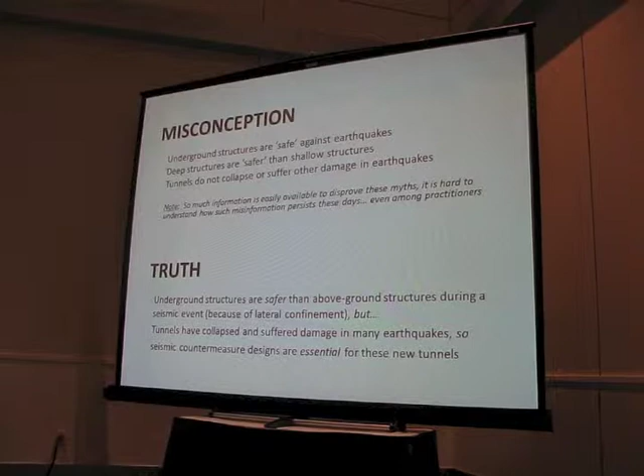Structures are safer than shallow structures - that is not necessarily the case. And then the last misconception here: tunnels do not collapse or suffer other damage in earthquakes - that's simply not true.

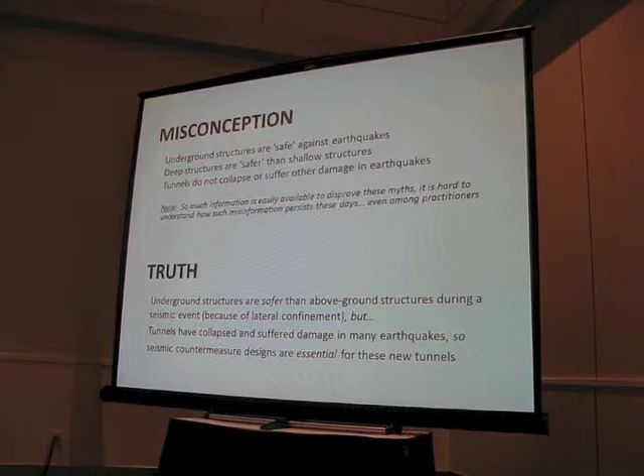So in studying this topic to prepare this presentation, what I found remarkable is that there is so much information that is very easily available to disprove these myths. And it's hard for me to understand how such misinformation persists these days, even amongst practitioners.

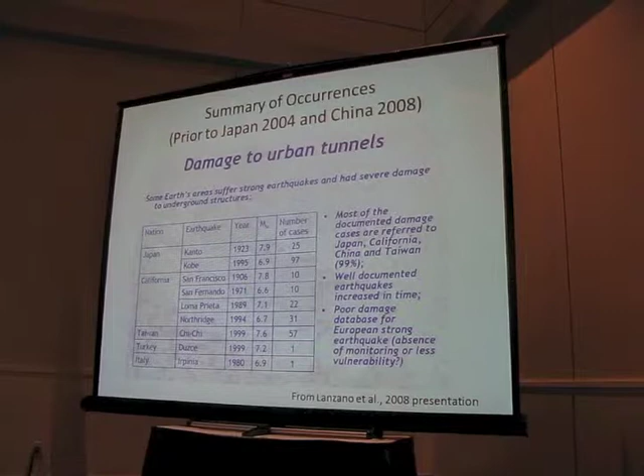This is from a paper that was published a few years back, a review paper that talks about damage to tunnels from earthquakes going back as early as 1906 San Francisco and 1923 Kanto in Japan. Some of these are well-known, well-studied cases early in the 1900s, but then also more recently some very well-studied cases like 1999 in Taiwan, the Chi-Chi earthquake, and then also more recently Japan 2004 and China 2008.

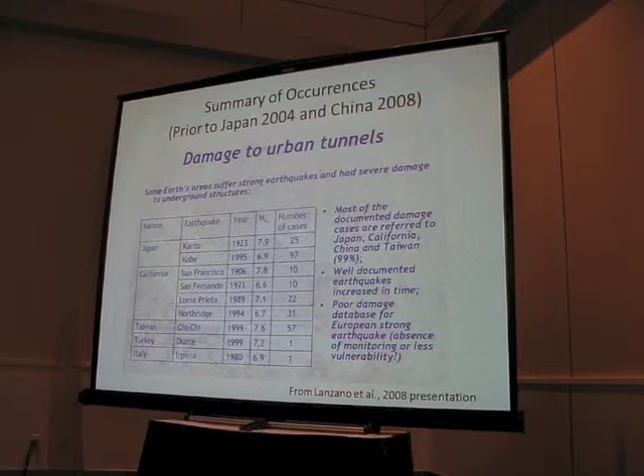Many more cases were studied, and you see these numbers in the right-hand column. There are not just dozens, but actually hundreds of cases of damaged tunnels, damaged by earthquakes, that have been studied by engineers. So this is actually a well-studied topic.

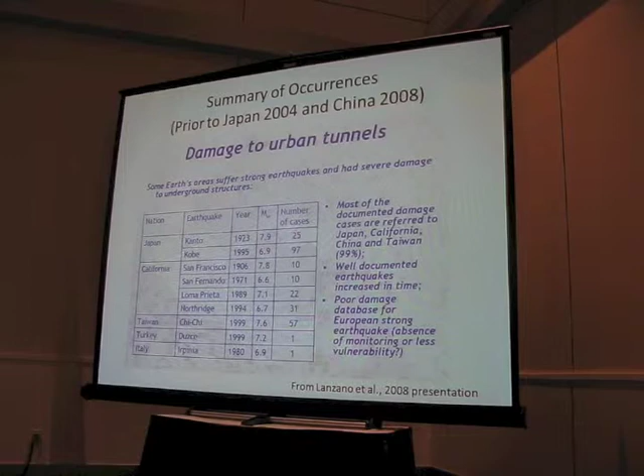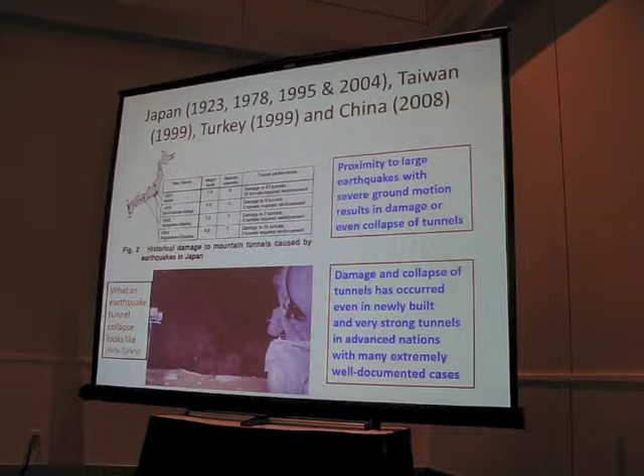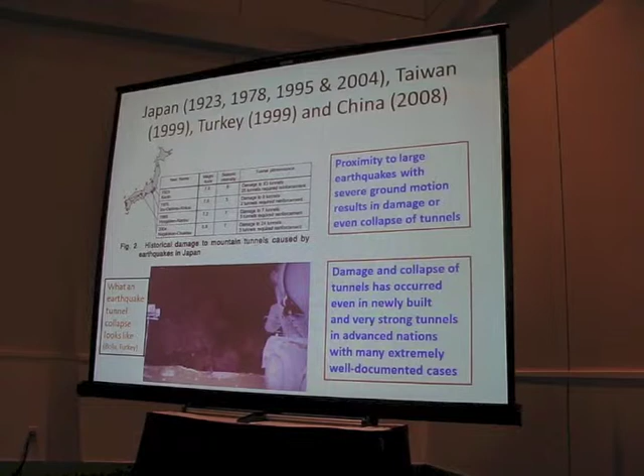I mentioned a few of these, but the other earthquakes in Japan that have been carefully studied also include 1978 and then the Kobe earthquake in 1995. In that case, I won't show it here, but there was a collapse of an underground station. So the large vaulted ceilings of an underground space like a subway station can collapse, and did, in the Kobe earthquake in Japan. I'm going to limit my comments here and this review to tunnels specifically, but underground stations also would need to be built extremely strong.

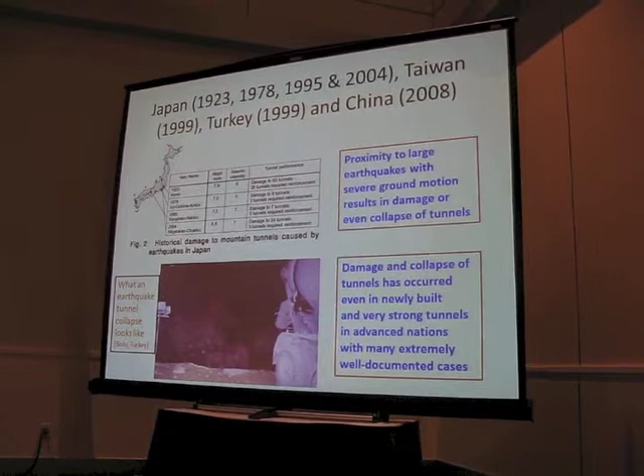So proximity to large earthquakes that have severe ground motions can result in damage or even the collapse of tunnels. Damage and collapse of tunnels has occurred even in newly built and very strong tunnels in advanced nations, with many extremely well-documented cases. The picture in the lower left is actually from Turkey.

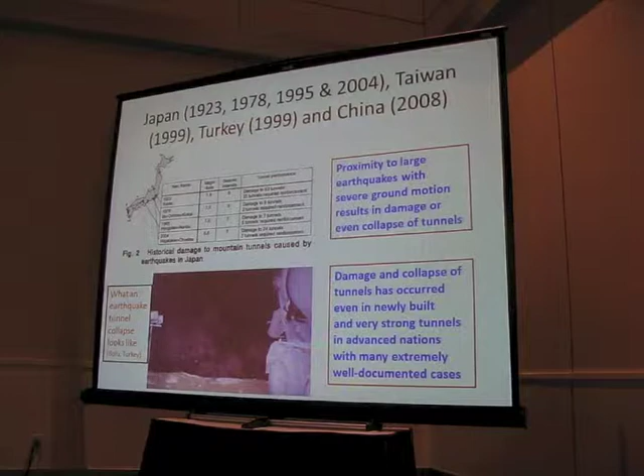This is a tunnel along the Trans-European motorway, and in fact this case takes a bit more explanation - we can come back to it. But this is a total collapse that you're looking at there. It was while the tunnel was under construction that this occurred.

And then the Longxi Tunnel in China collapsed in 2008. Again, a lot of these are examples of relatively modern construction where engineering design tried to take into account potential damage from earthquakes, and yet these failures occurred.

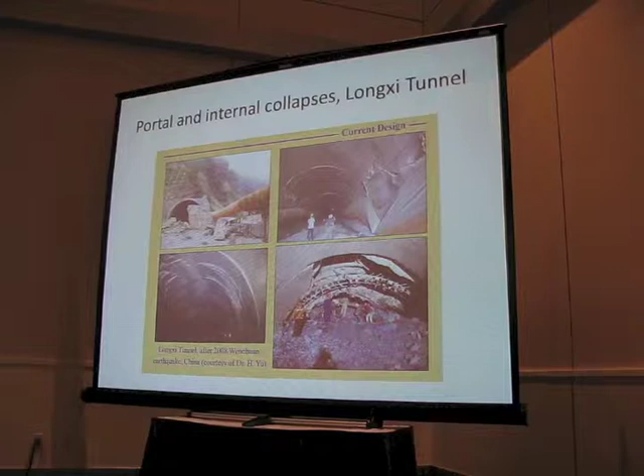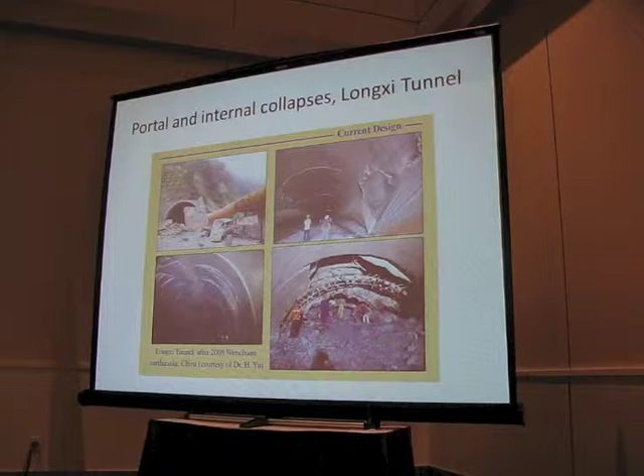One thing to note here is that the upper left photograph shows what's called a portal collapse. The entrances at either end of the tunnel need to be well designed so that you don't have rockfall or landslide damage at the ends.

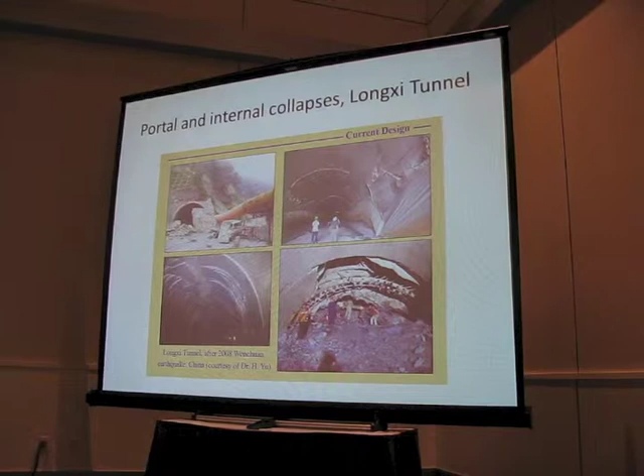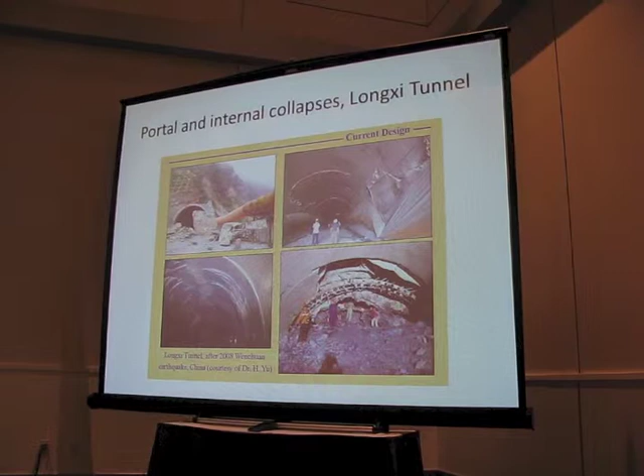And then the internal photographs show you examples of the kinds of cracking that can occur when a tunnel is compressed. It's called ovalization - you take a circular tunnel in cross-section, and the shaking can actually compress it and make it an oval shape, and that will result in cracking of different kinds that have been very carefully documented.

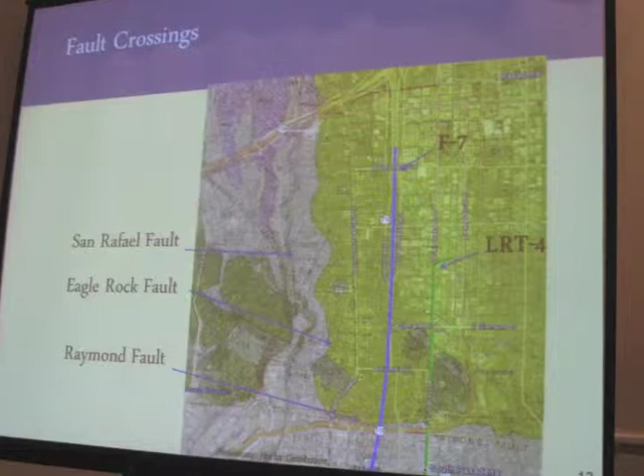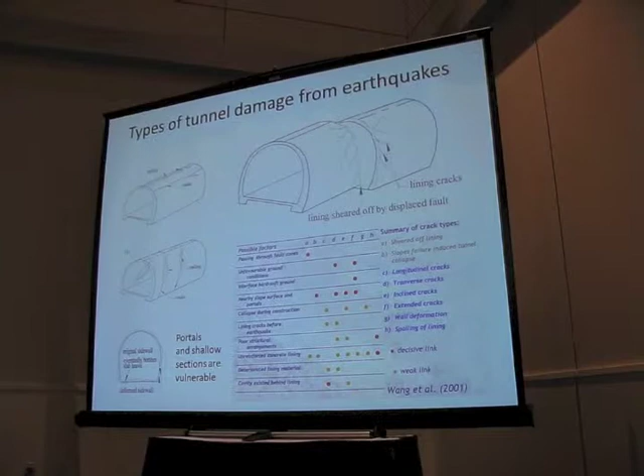This is just a summary of the many cases studied by Wang et al. in a very important paper in 2001. Another earlier paper, Yoshida 1999, reviewed this topic as well and showed ways in which one can design a tunnel to avert some of the kinds of damage that would otherwise occur.

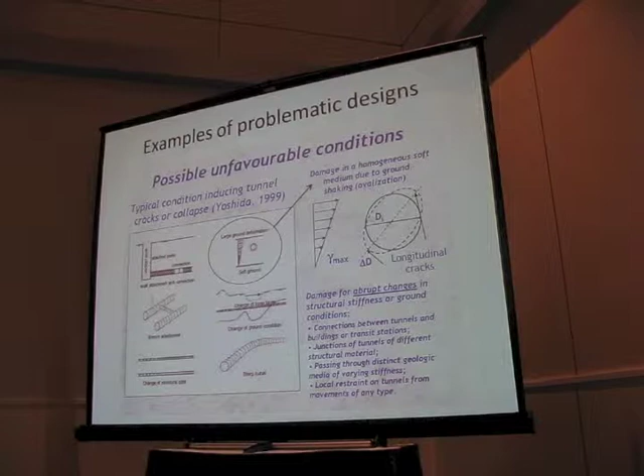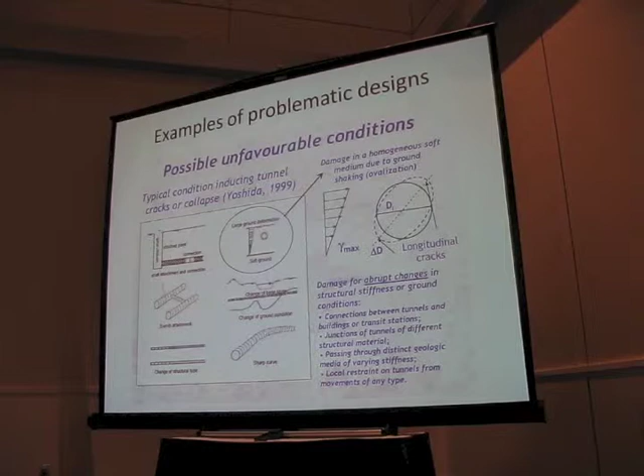So you want to make your tunnels straight, you want to have your connections heavily reinforced, and so forth. Best practices have also been recommended, and here's another one - design countermeasures.

Steve actually just showed you an example of this, where the plan would be that where tunnels cross faults, they would do this kind of jacketing to make the tunnel especially strong. This is not only important at fault crossings, but also where you have stiff ground, like what's shown here on the right, to softer ground shown on the left.

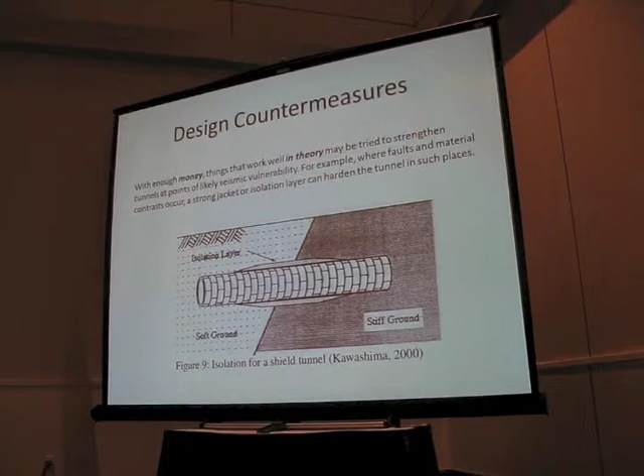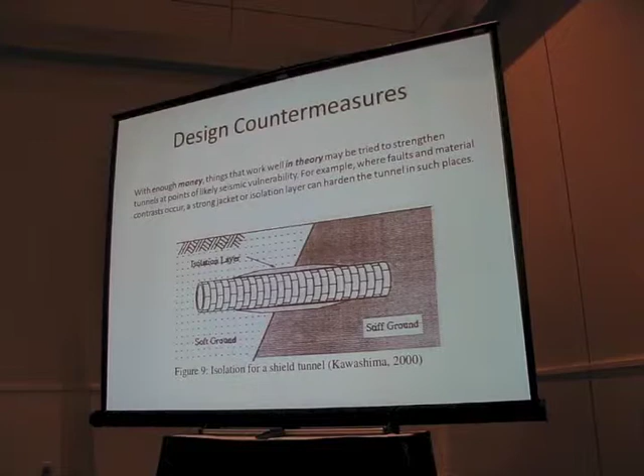Not only at active fault crossings, but also faults not considered active, and at strong transitions from stiff to soft ground, this kind of jacketing can help prevent collapse and failure.

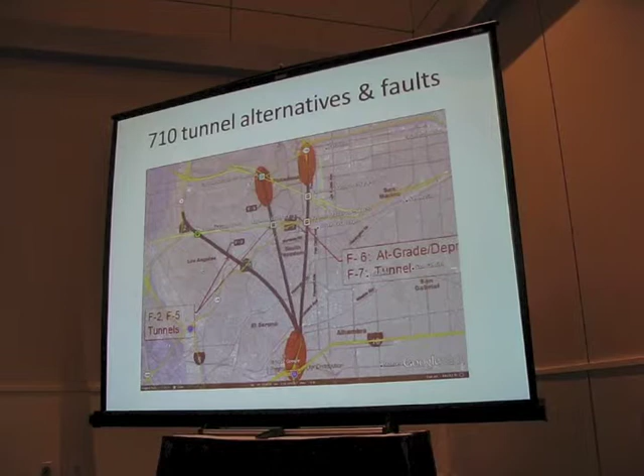Here are the proposed routes. The F7 route, as Steve just presented, is the one currently still being considered, but the other two take alternative paths, which you can see in other documents about 710 tunnel alternatives.

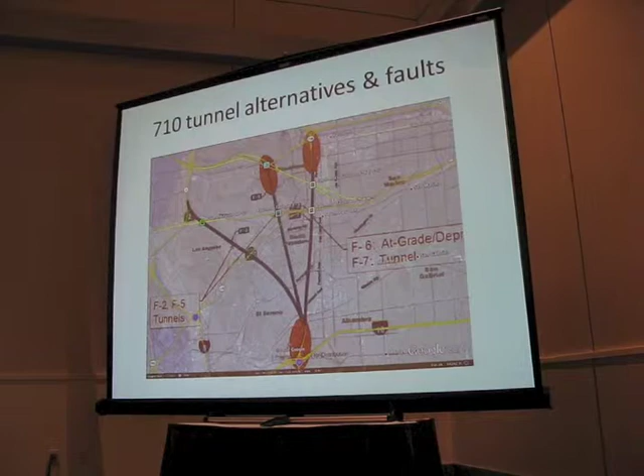I've shown here—I hope this laser will work. The yellow line is the Eagle Rock Fault Zone, and this is the Raymond Fault coming across in orange. I've darkened the map layer and let the base imagery come through so you can see the faults better, and the squares show the fault crossing points.

The F2 tunnel actually only has one fault crossing, on a section of the Raymond Fault considered less active, whereas the other two have two crossings each. I've highlighted those lines, and I'm going to punch through these slides.

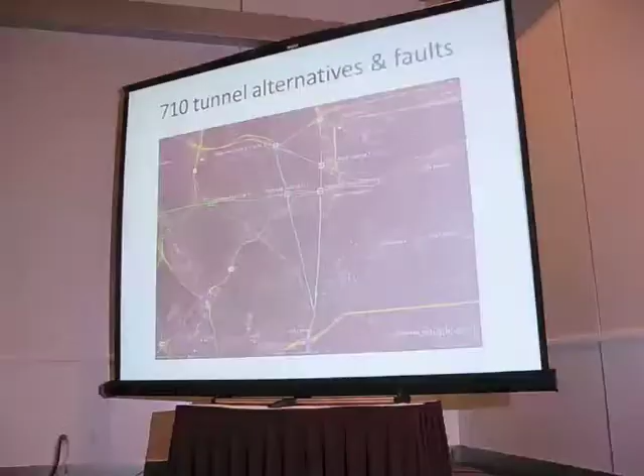Now let's take a look at that from the south. At the south end, you see the elevation here—this is the number 7 alternative coming right up into Pasadena, crossing those faults.

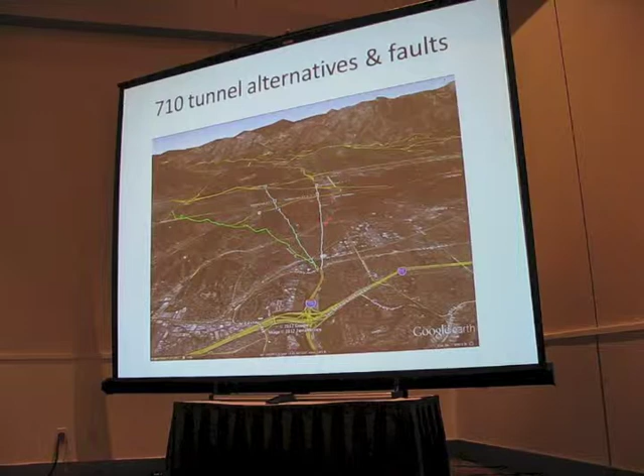What I'm going to show you next is something that occurred to me that I think should be taken into account. Apparently only this tunnel is still being considered, but of the other two, this one has a higher north end, and this one has a lower north end.

You can't see the elevations on this slide, but this one goes from 410 feet up to about 830 and 890 feet, whereas this one only slightly rises to 680 feet. So I'd think the lower grade in this tunnel would be an advantage, since you'd have less exhaust fumes and less brake pad lining fumes to ventilate—a simple advantage based on the topography.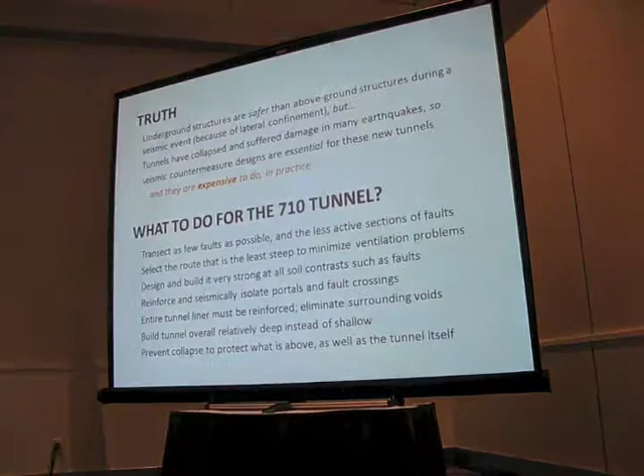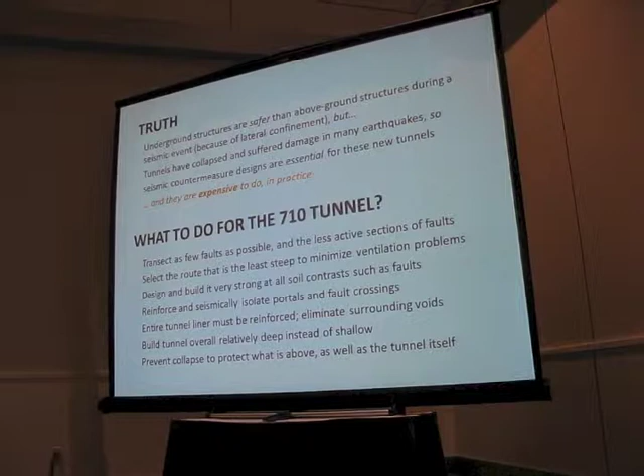Anyway, that's all I had. I wanted to wrap up with a recap of that intro slide: while underground structures are safer than above-ground structures, they still need to be carefully designed, and that's expensive to do in practice. These are just a list of things that ought to be done if the tunnel is pursued.

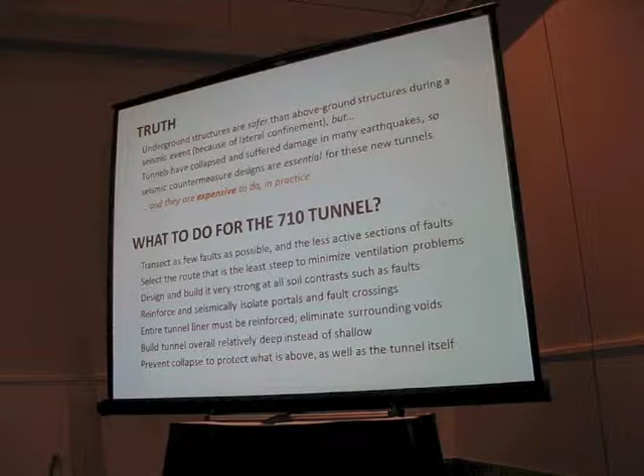Transect as few faults as possible, and in the less active sections of those faults. Select a route that is the least steep to minimize ventilation problems. Design and build it very strong, especially at all soil contrast points and at faults, whether active or not, especially at active fault crossings.

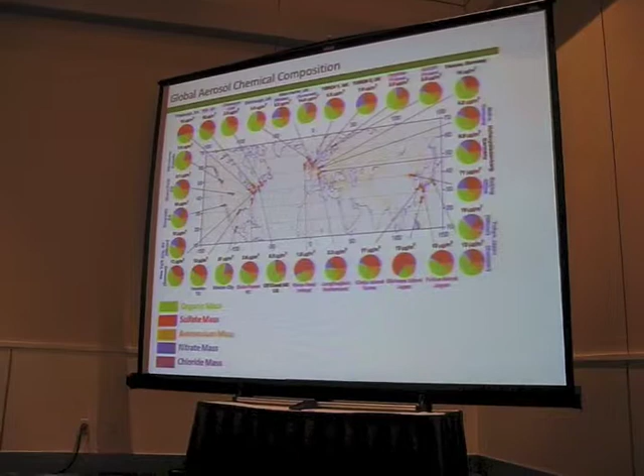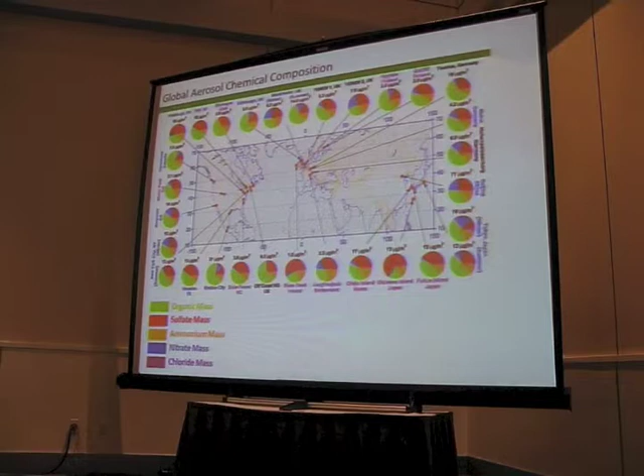Compounds and nitrogen oxides, in the presence of organic compounds and sunlight, make ozone. Ozone is the molecule that is monitored, and it's usually what you find in the paper as a measure of whether a particular day is smoggy, based on the ozone level. These are gases.

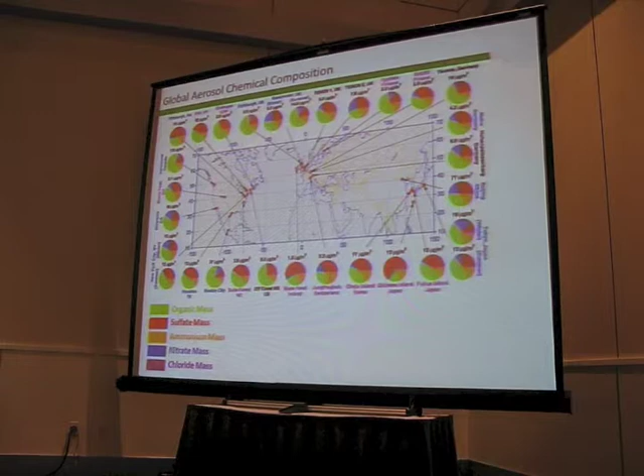Now, the air also contains particles, and that's what I mainly want to talk about. This chart, the first of two slides, I want to walk you through because it tells a lot about the nature of particles in the air around the Earth and what they're made of.

This map shows measurements of particle concentrations in the air at a number of locations around the world. Each of these little pie charts has colored sections corresponding to the different chemicals in the particles.

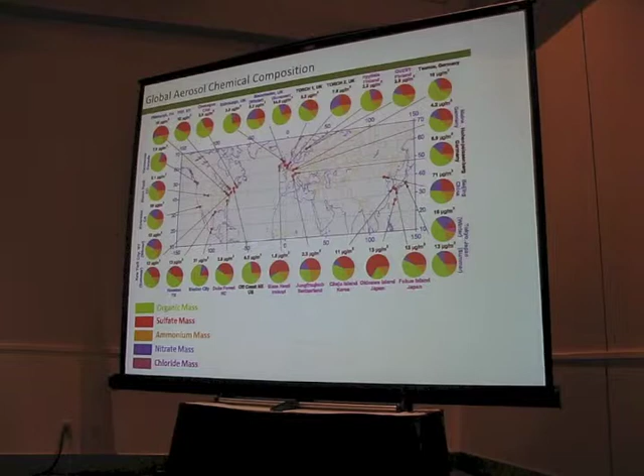Green represents organic molecular particles. Beijing, in red, has the highest pollution, at 71 micrograms.

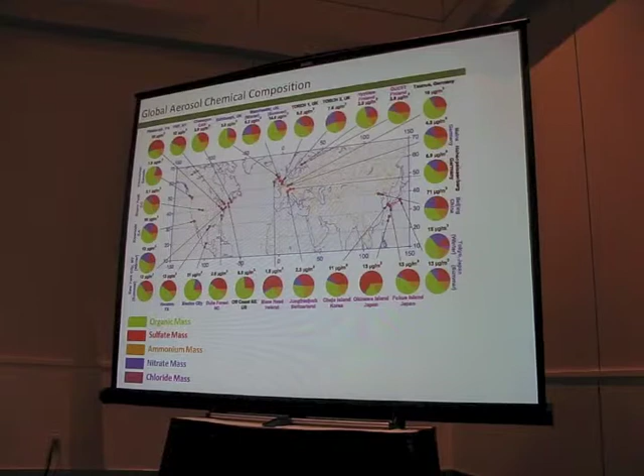The other extreme—the lowest concentration—is Mace Head, Ireland, on the west coast of Ireland, getting very pristine air off the North Atlantic, with 1.5 micrograms per cubic meter.

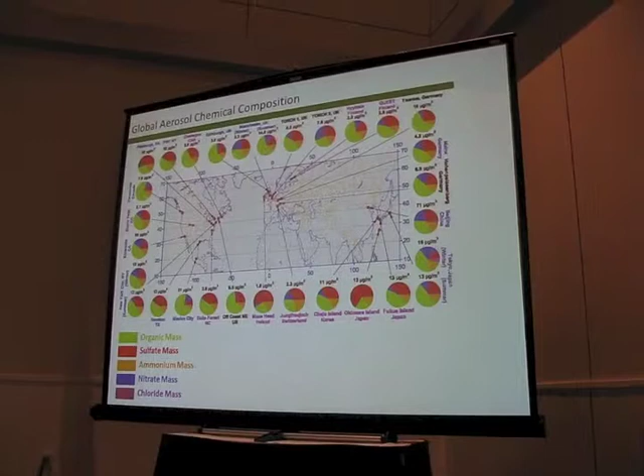Ireland has the least particulate matter. I show this to give you an idea of what's in the particles, and we can trace each of these, summarized here in bullet form.

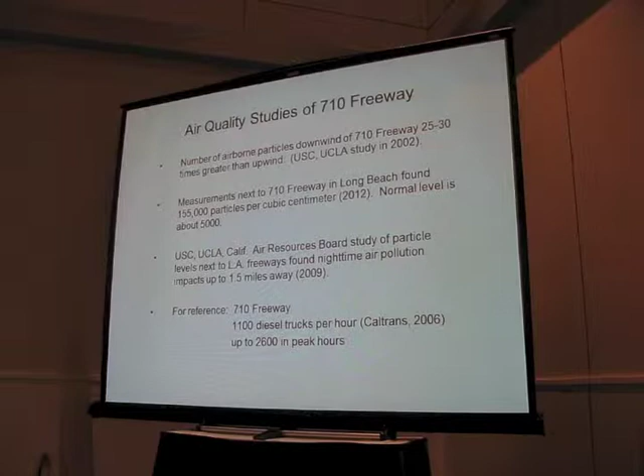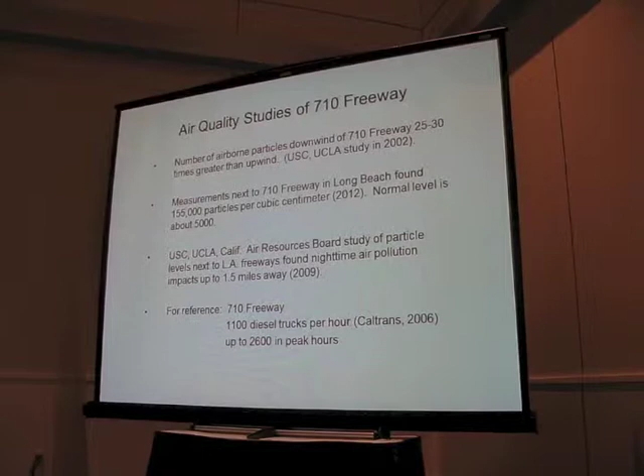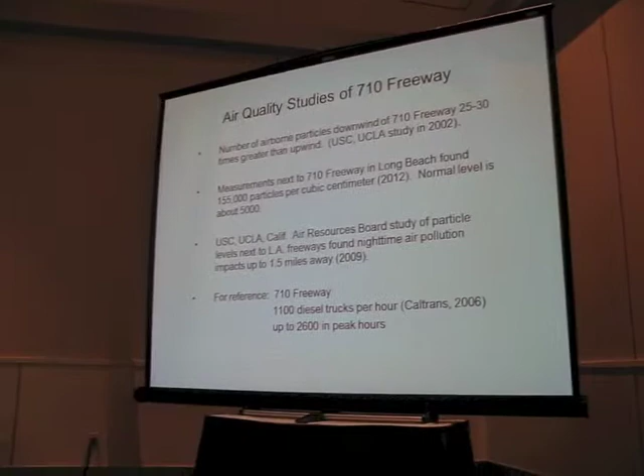The first one is a 710 study of the influence of the freeway on the surrounding community. Measurements made by USC and UCLA groups in 2002, in a very famous study of the 710, showed that the number of ultrafine particles, that's the number of particles per cubic centimeter, downwind of the freeway was 25 to 30 times greater than that upwind of the freeway. That's a measure of the exhaust.

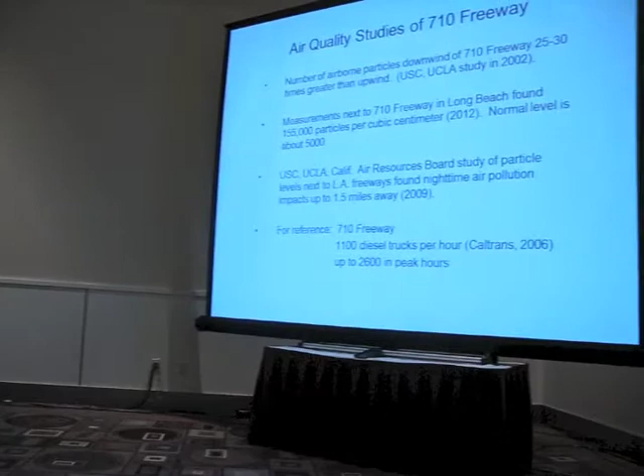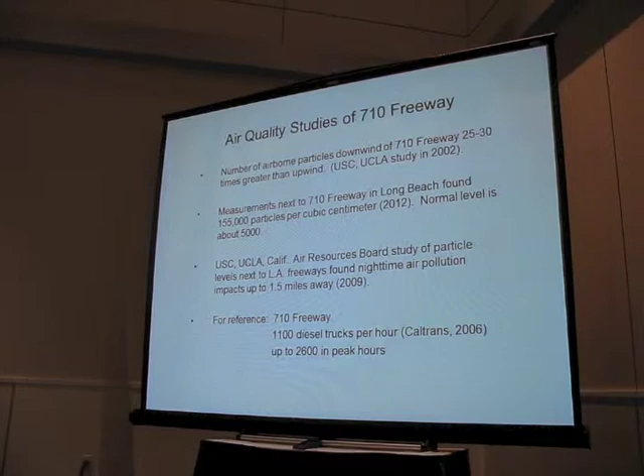A recent measurement next to the 710 in Long Beach found 155,000 particles per cubic centimeter. The normal level would be about 5,000, and pristine air would be less than 1,000. That's a pretty remarkable level.

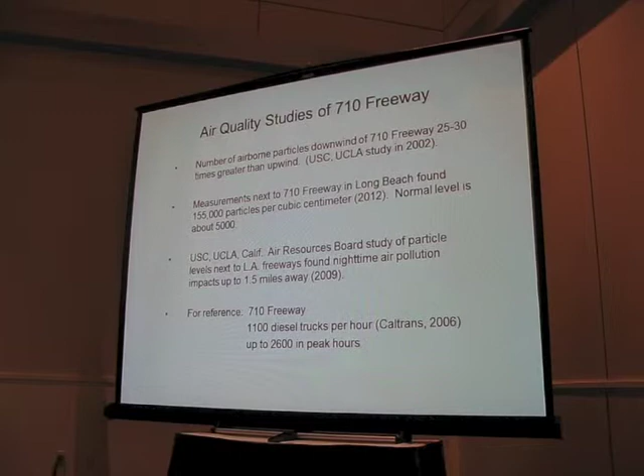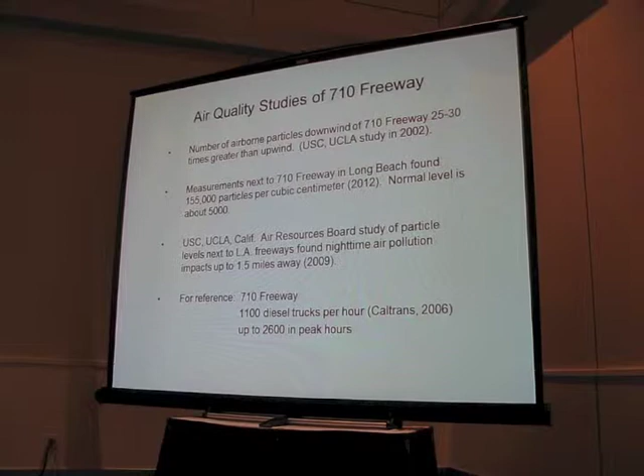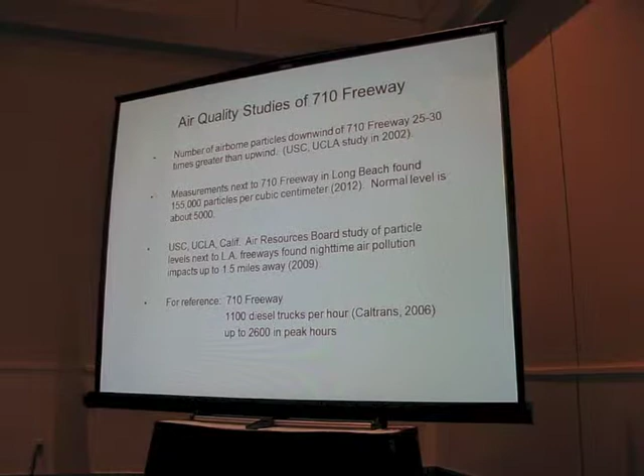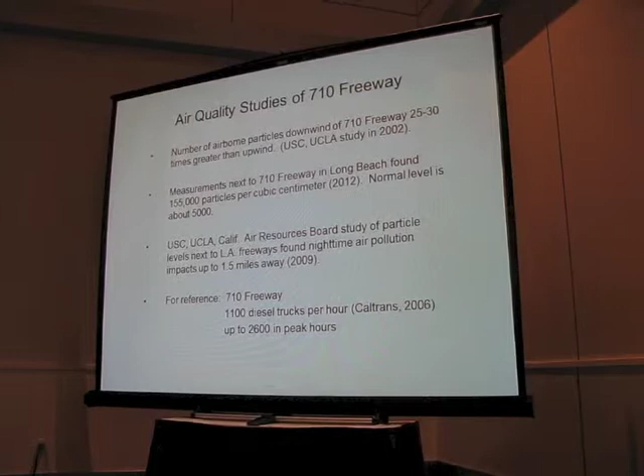Another study by USC and UCLA groups looked at this question of the influence of the freeway, how far away is it felt in terms of the community, and they showed that the freeway was felt in terms of the level of particles about a mile and a half away. Just for reference, at the bottom is the traffic on the 710 in terms of diesel trucks per hour.

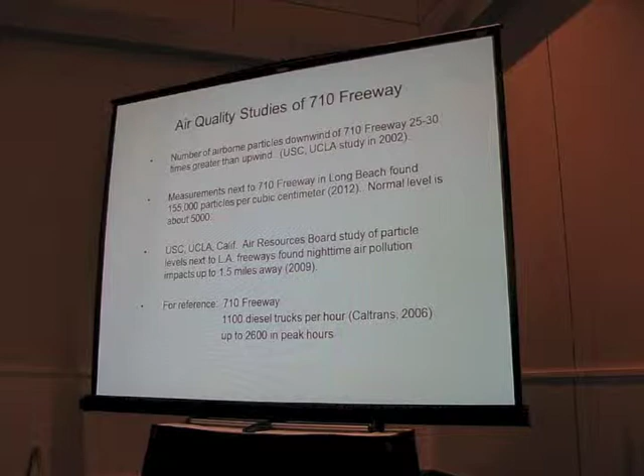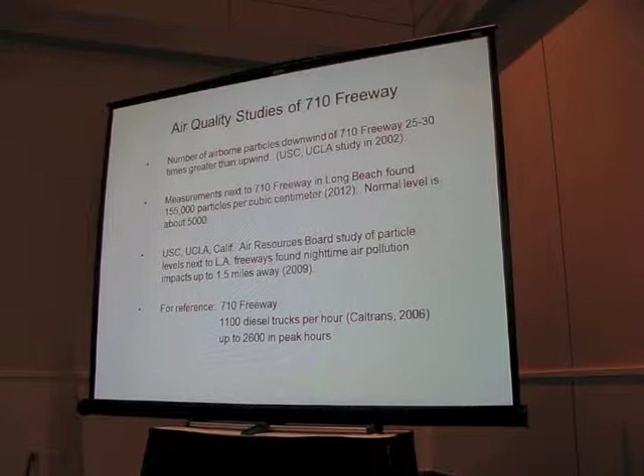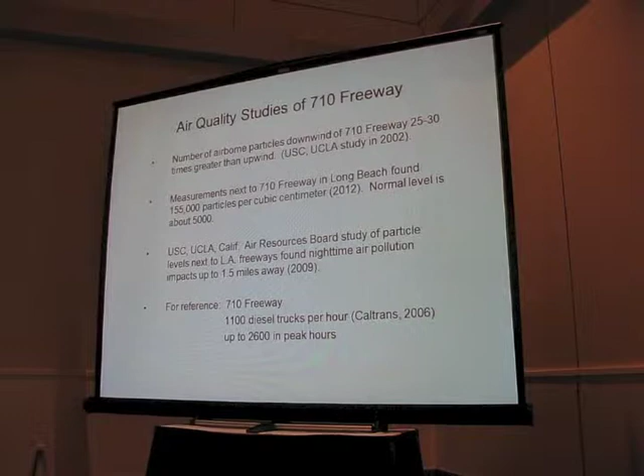I'll just say, and this is the point where I'm going to hand things off to Rob, but those of us in the field of air quality and urban areas and emissions have long considered the 710 freeway to be arguably the dirtiest freeway in the country. That really is a function of the heavy-duty truck traffic on the freeway. So with that, thank you.

710, dirtiest freeway in America, Dr. Seinfeld said, and now we're remembering why this matters in Southern California. I was a little disappointed not to see some discussion of this in the presentation of the panel. Next slide, please.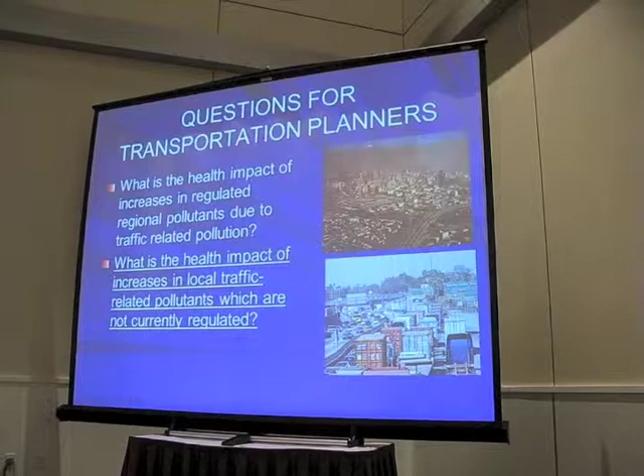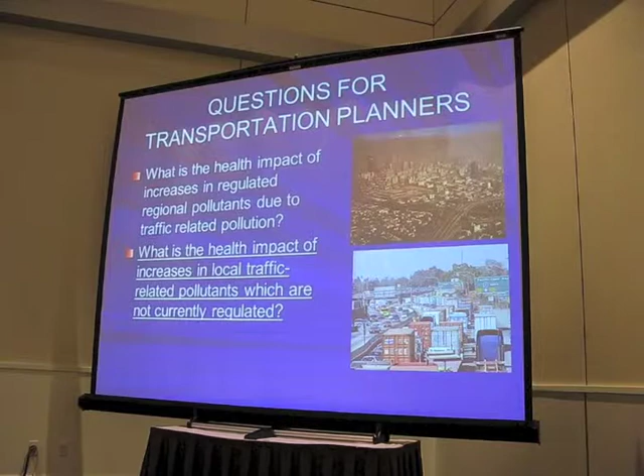I'm going to focus on two types of air pollution. One is regional air pollution, the kind that blankets large areas of the city and is regulated by the Environmental Protection Agency. The other involves new findings within the last 20 years about the effects of near-roadway pollutants, the type you might experience if you lived next to or close to the 710 freeway.

A lot of what we know about air pollution comes from studies here in Southern California. The Children's Health Study is a longitudinal evaluation of 12,000 participants in communities throughout Southern California with high and low levels of different pollutants, including children who live near or far from major roadways. We've examined rates of respiratory disease among these children to get a handle on the effects of pollution.

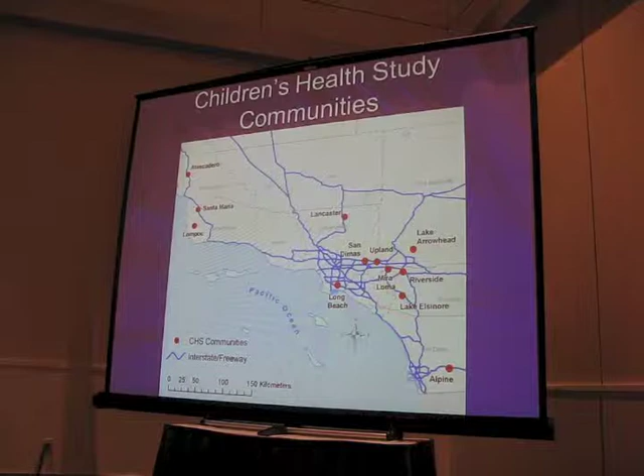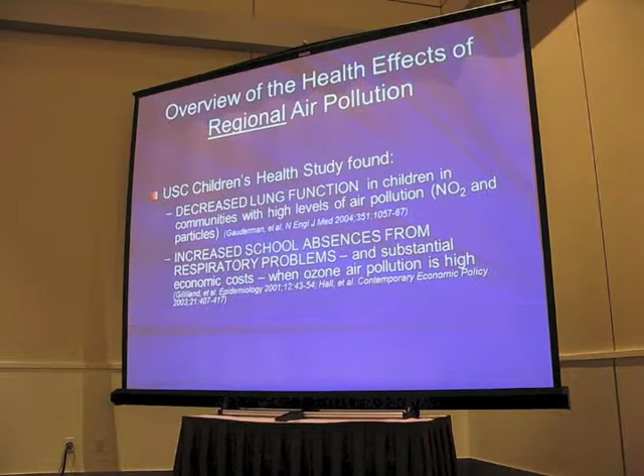I'll give you a brief summary of results from the Children's Health Study. We found decreased lung function in children in communities with more particles. We found increased school absences from respiratory problems shortly after times of high ozone levels in communities. We found new-onset asthma in children exercising heavily outdoors in high-ozone communities, and we found exacerbation of asthma in children living in high-particle communities.

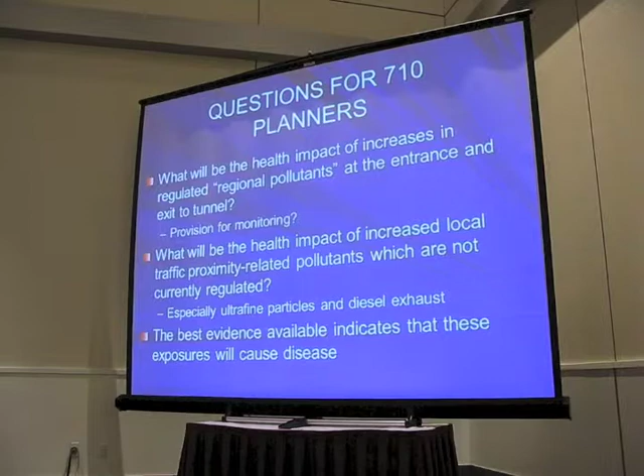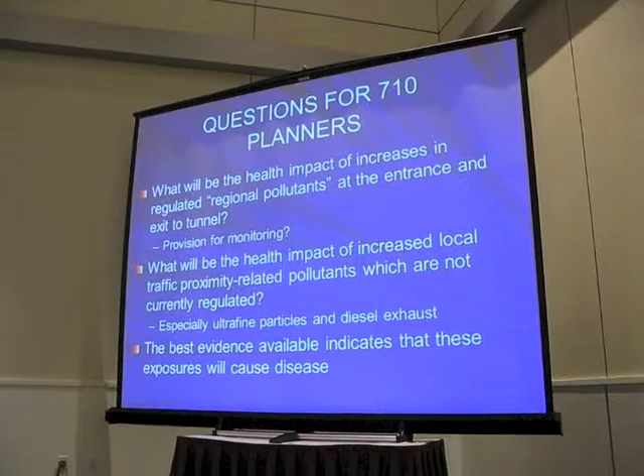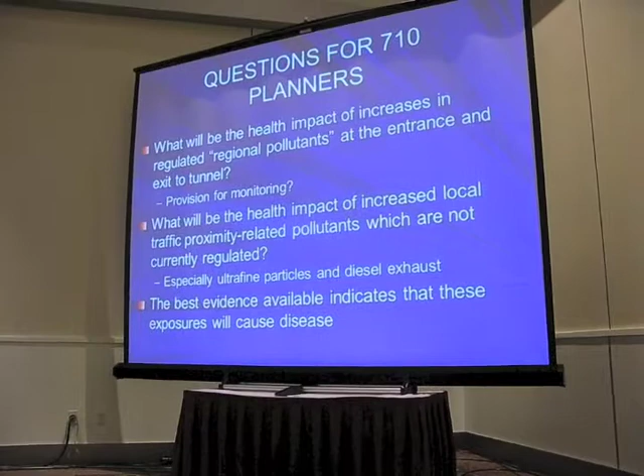I lived in Pasadena, and I would want to know what the health impacts of the increases in regulated regional pollutants are, both regionally across the basin and at the entrance to the tunnel, where levels are likely to be much higher than elsewhere. Secondly, I'd like the best estimate of the health impact of increased local traffic proximity-related pollutants that aren't currently regulated but clearly cause health effects.

I think the best evidence available would indicate that this expansion would increase exposures and that it'll make people sick.

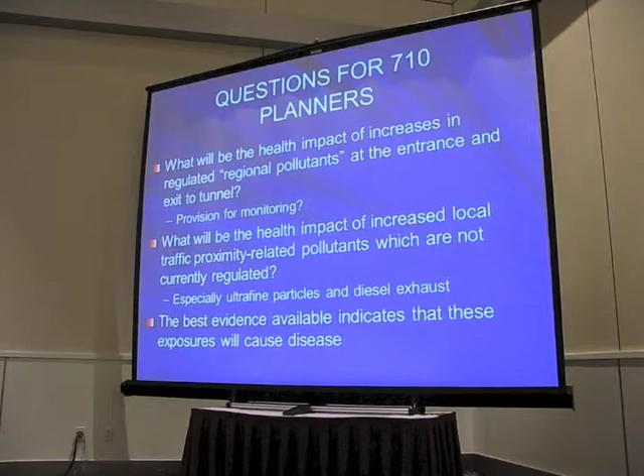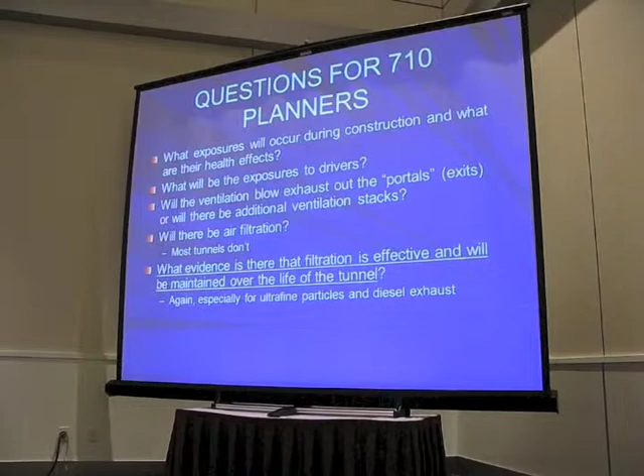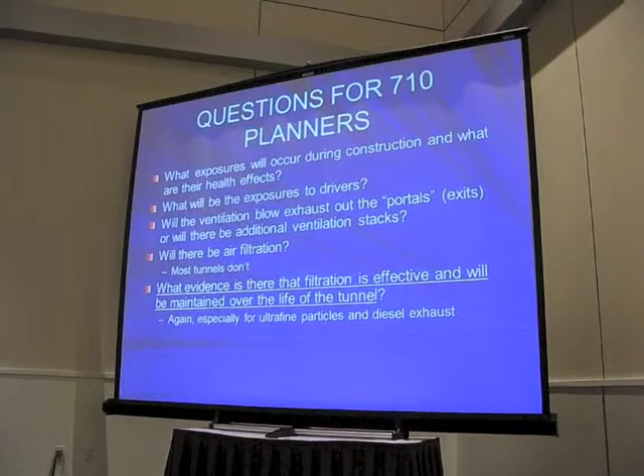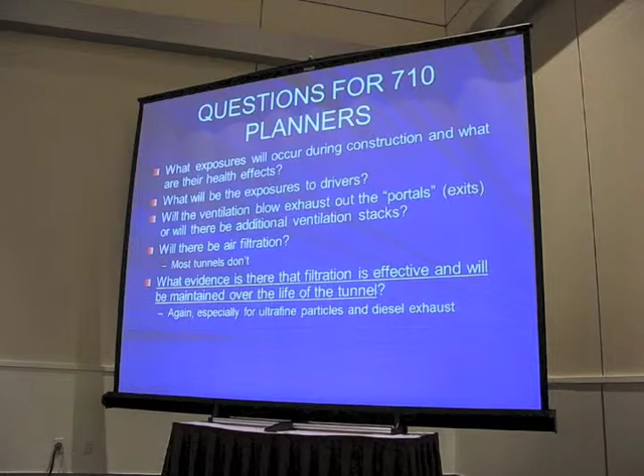Finally, some questions aren't often considered in the context of tunnel construction and exposures. What will the exposures be during construction, and what might those special construction effects be? Will the ventilation blow the exhaust out the portals, or will there be additional ventilation stacks? Will there be air filtration, which most tunnels don't have? If there is, what's the evidence that the filtration is effective and will be maintained over the life of the tunnel, particularly for the very small particles Dr. Seinfeld referred to, and for diesel exhaust particles that are hard to remove?

I'll finish with this slide of a ventilation building from another big tunnel, the Big Dig in Boston.

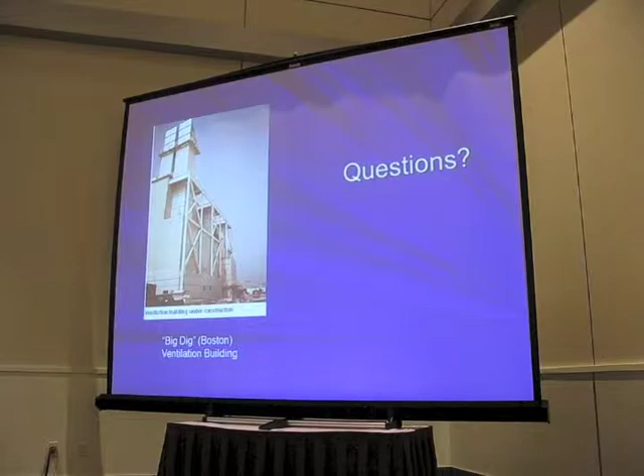Okay, the third time is the charm. Well, I want to say—Mossman.

I want to say what an honor it is to be part of this very illustrious panel. I have no slides to show you, which is unfortunate because they're much more interesting than looking at me for five minutes. My comments tonight will be much less scientifically based, but they are based on years of experience with conditions we all share and care about in Pasadena, South Pasadena, and further south through El Sereno, and also on comments made at advisory committee meetings by experts who helped me frame these questions about impacts to historic resources when we consider a proposal such as the 710 extension and now the tunnel option, particularly the one for vehicular traffic, since we haven't looked as carefully yet at the option that might include light rail.

First, I want to say very quickly that Pasadena Heritage has been opposed to the 710 freeway in any form since our founding 35 years ago. And we've not been alone in expressing those objections. Our fellow organizations, including the Los Angeles Conservancy, the National Trust for Historic Preservation, the South Pasadena Preservation Foundation, neighborhoods up and down the freeway route, and in fact the President's Advisory Council on Historic Preservation, have all looked at this 4.5 miles and considered that, in terms of historic preservation impacts, this is one of the worst transportation proposals in its potential effect on historic structures.